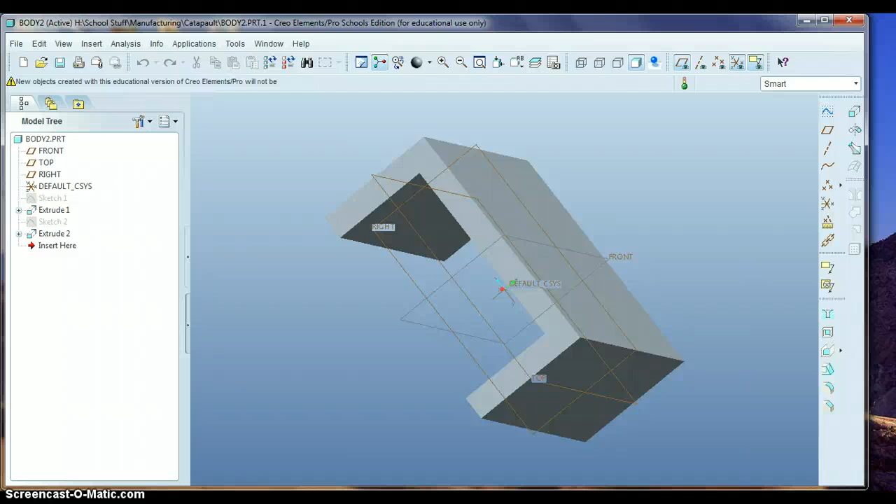Alright, we're going to add the holes for the wheels and also for the crank on the side of the catapult here. So to do that, we're going to go to Sketch and click on the side here. Make sure you don't click on one of these lines, but somewhere here in the gray. Click on that and you should see Surface here. We'll hit Sketch.

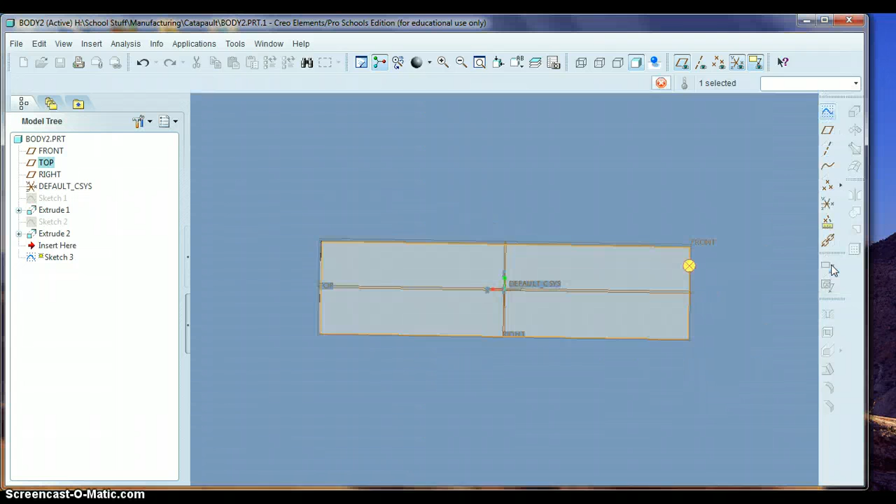Now we're just going to draw a hole somewhere like that, and let me measure this real quick to see what size this hole is. Looks like this might be too big, but we'll go with this to start with. Looks like about 1/4 of an inch, which is 0.25.

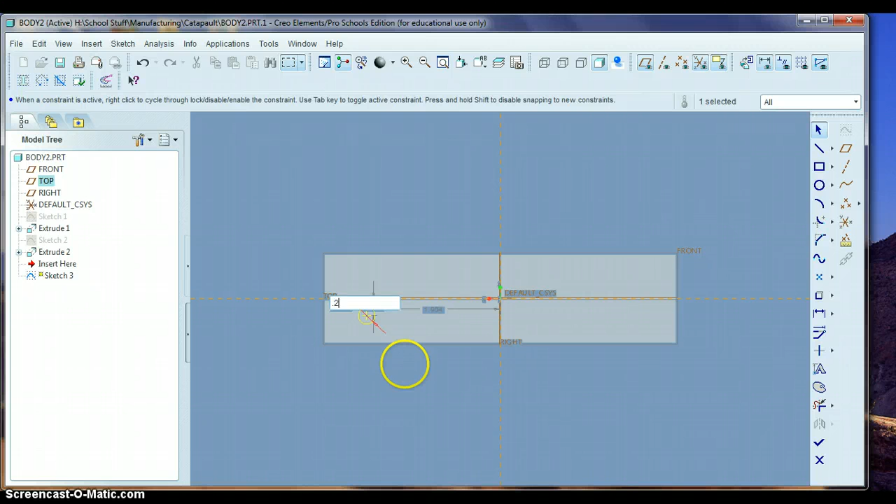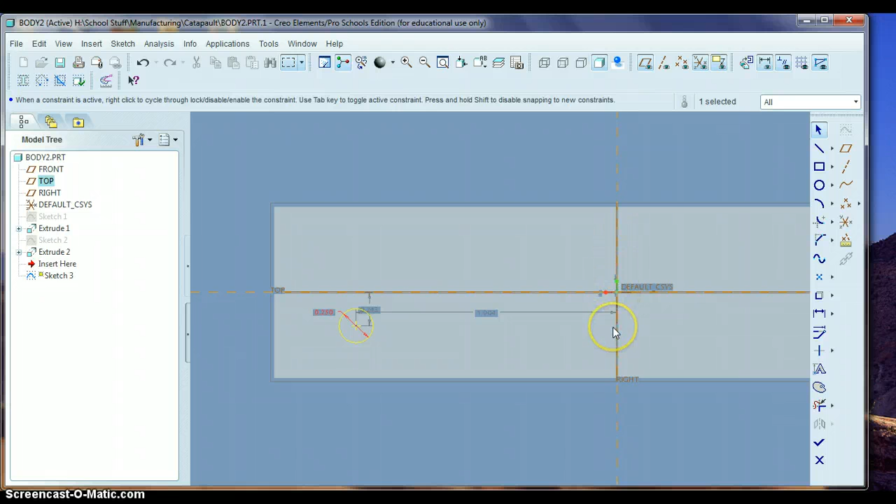Now we need to locate this, and so I have a couple dimensions here. One dimension wants to go from the center of this part to the center of the circle, and usually holes and circles are measured from the center. So this one right here wants to go from the center of the circle to the center line here of the part. Now I don't really know where the center of this is. I mean, I could figure that out, but for us, I think a little bit better way to go is from an edge, to measure from these edges.

So to get a reference line from these edges, we can't just click on this here because the computer doesn't really know exactly where this edge is. So we need to define that.

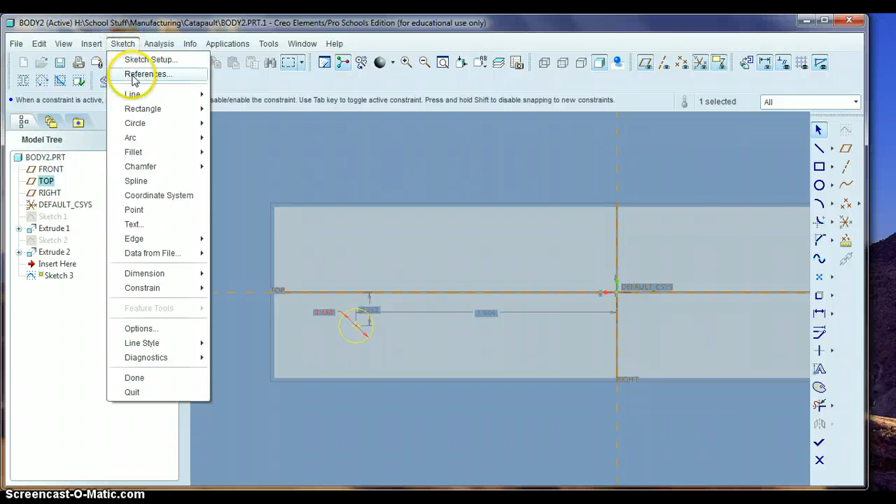We're going to go to Sketch, and in the Sketch pull down menu here, we're going to go to References. You can see this little box pops up here. I'm going to move my mouse over to where this little blue line pops up and click there. That gives me a reference for the front of this catapult. I'm also going to move my mouse down to where this blue line pops up at the bottom, and click that. So now I have a reference for the bottom and the front. And we'll hit close.

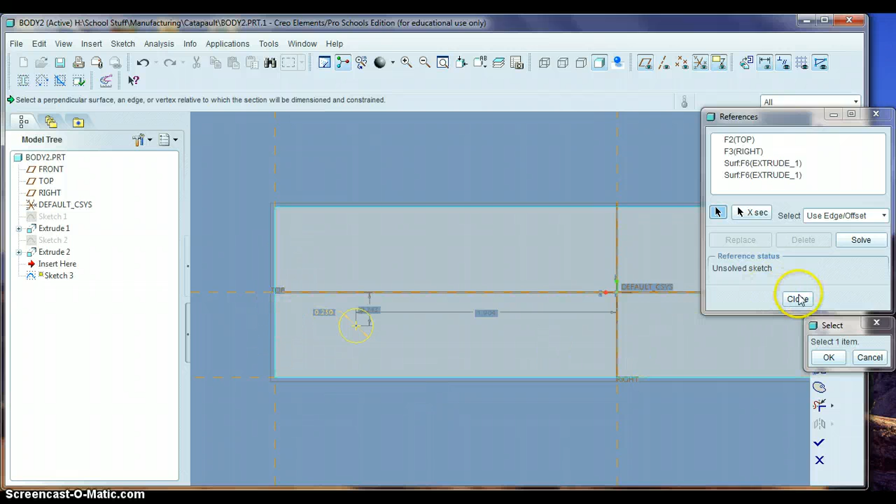And you can see already this measurement is now going from the front here. And what we have on Cobb's model is about 3/4 of an inch, which is 0.75 from the front.

And I'll even back up here. Let's say you don't have this measurement. We can add measurements real easy. We can go to this button right here. It says normal, but it's to create dimensions. I'm going to click on the center of this circle till it highlights blue. Then I'm going to go to the front here, this dotted line here, and click there. Those were 2 left clicks.

Now I'm going to use my middle mouse wheel, pushing down on it like a button. You can see it pops up with a dimension now, and again that was 0.75, enter. You see that other one disappears, and we're going to just go with this one.

So now I need to create a dimension here from the center of this circle to the bottom to figure out where that goes. And we'll go with about 1/2 inch here.

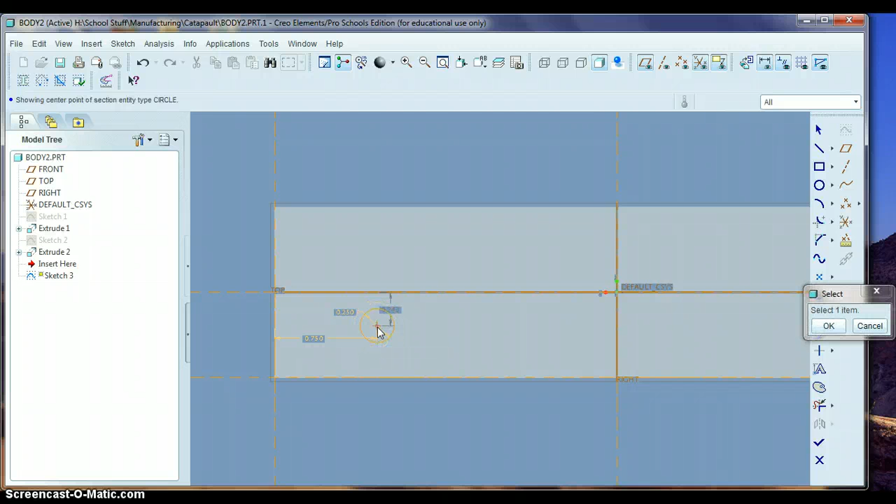So I'm going to highlight, turn on the dimension tool, and this little window pops up. Don't hit that — if you hit OK, we've got to start it all over again. So just click on that and leave that little box alone. Again, start in the center of the circle, left click, then left click with the left mouse button down here, and then use that middle mouse wheel like a button, and click. And that was 0.5.

And that moves that circle up. So now we have the circle the size we need it, it's in the right location, and now we just need to add one back here.

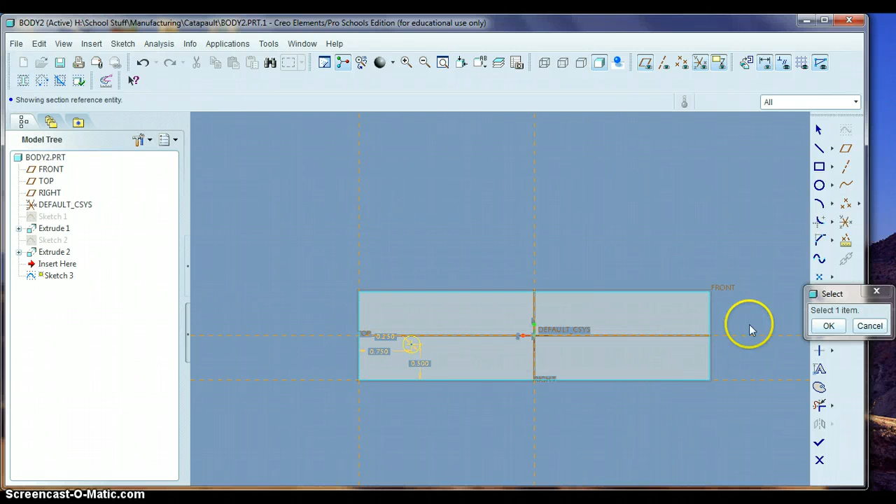So I'm going to click on the circle tool, and move my mouse around, and there's the bell. If you see this little red bar pop up on this, you can see it over here on the circle we've already drawn, and then wherever my mouse is, that means the center of the circle I'm going to draw and the center of the previous circle are in line.

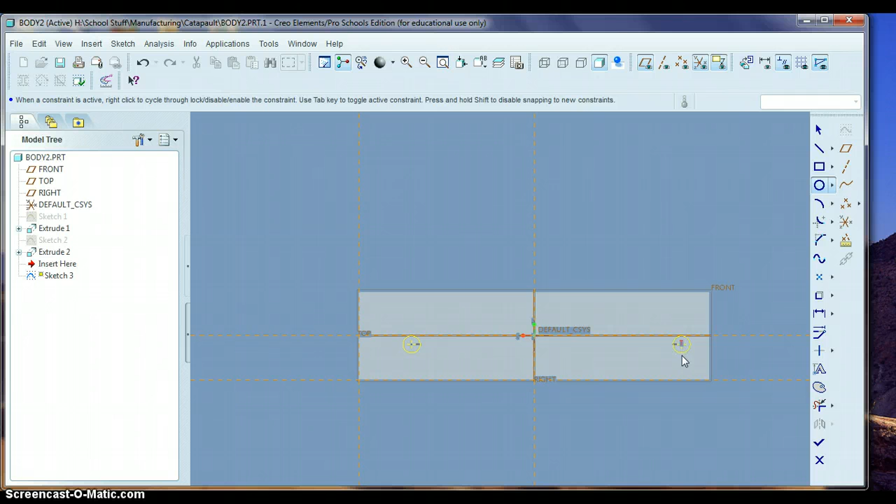That's what we want. We don't want to have to go back and refigure out where this goes. It'll save us a few steps. So I'm going to click and move my mouse until I see a red R pop up.

There it is. It's the same size as the previous circle. You see there's a red R on the first circle that we drew, so that means they're the same size. We don't have to go back and figure up and create the dimension again.

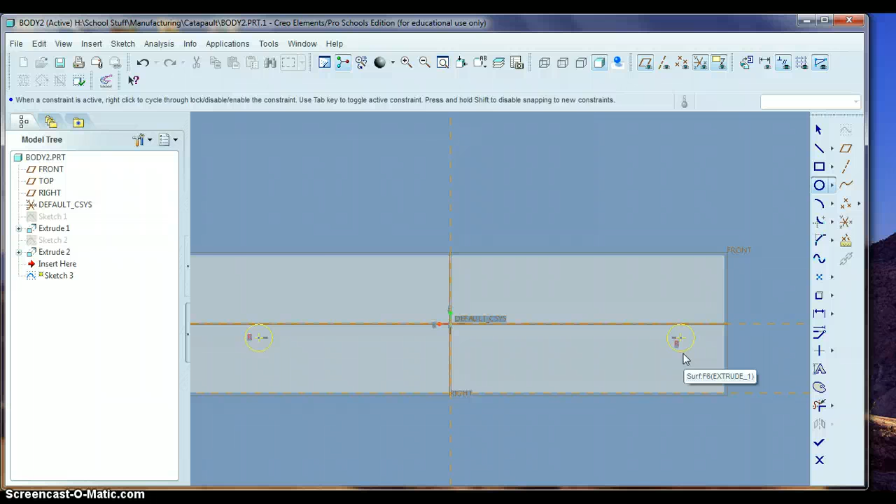So again, move your mouse till you see that red R, and then click, and click on this blue arrow. So 0.25, this circle is 0.25 because it's going off of this measurement here. It's 0.5 up. Now we just need to figure out how far

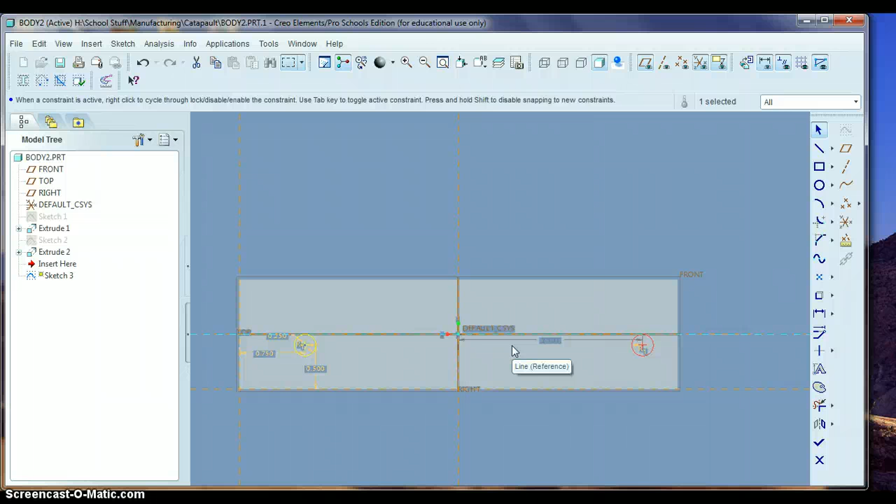away it is this way. So let me measure real quick here. We'll figure this out. This circle is 4.5 from the front. So I'm going to click on the dimension tool and click on the front, this reference line here.

I'm going to click on the center of this circle, then use that middle mouse wheel again as a button, and that pops up, and it was 4.5. You can see we were pretty close on that. We'll just make it accurate.

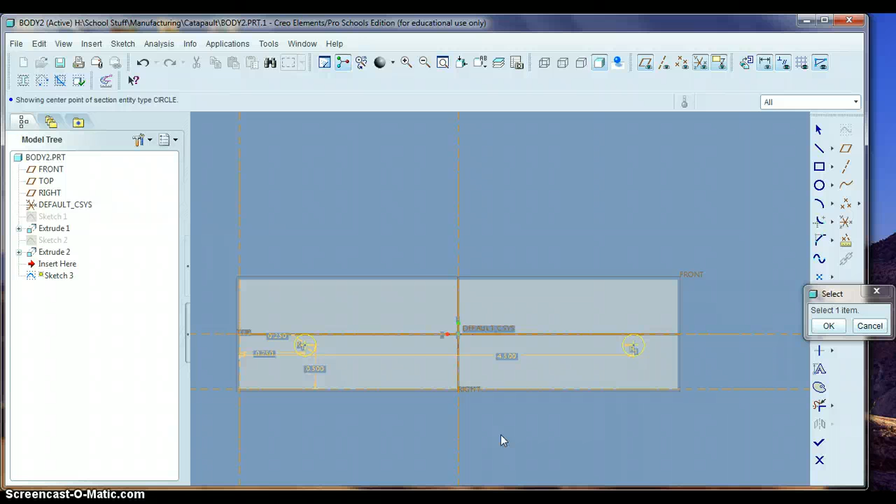So there's that one. And then the last hole, I don't exactly know where it was going to go, but somewhere in the middle here. I'll tell you what, just to make this easy, we'll click on the circle and we'll move our mouse right on this center dotted line until that red line pops up, and then again move it out until you see that R.

And that's right in the center. It should be right in the center of our part, the body. Same size as the other two circles. So we should be good.

If you don't have some of these reference lines, let me know, I'll be happy to help you get these. We'll hit the check mark.

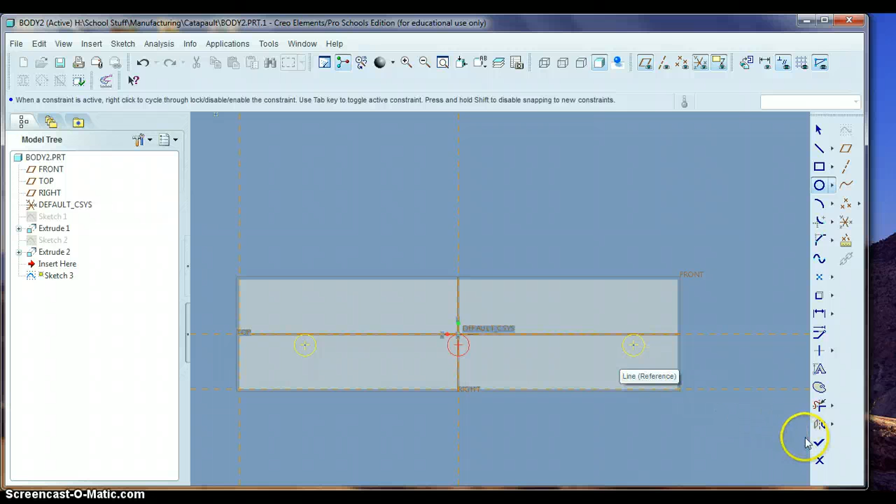We're done. And now to make a hole, we're going to hit the extrude button, kind of like what we did when we cut out this middle part here. I'm going to use this little arrow. I'll flip the direction.

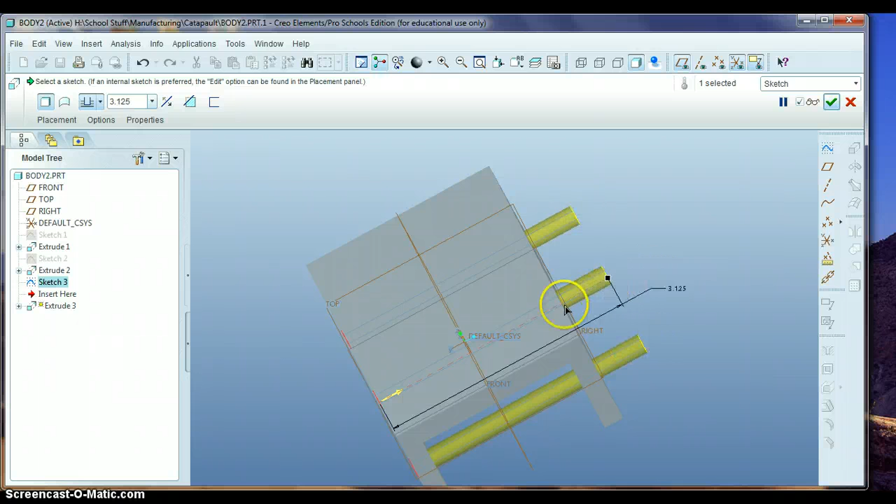And again, you can use this little white box here and drag it out, or you can use this pull down menu and say have it intersect with all surfaces, and it pops it out there. And then we'll hit the remove material button, and we'll hit the green check mark, and there's the holes for the axles and for the little crank to pull the throwing arm down.

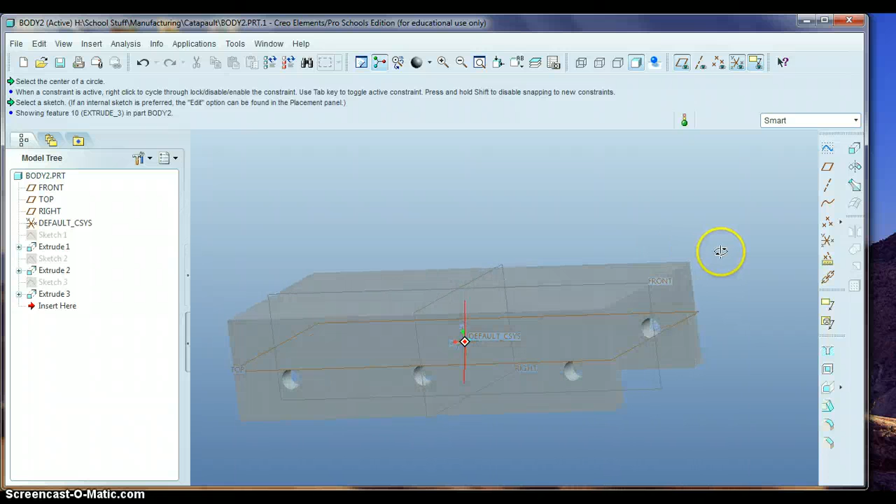Now the last thing we'll do is we'll put a hole in the top of the body, so that we can have the little string or whatever pull the throwing arm down. So I'm going to go to sketch. I'm going to click on the surface again, just somewhere over here in the gray, and hit sketch.

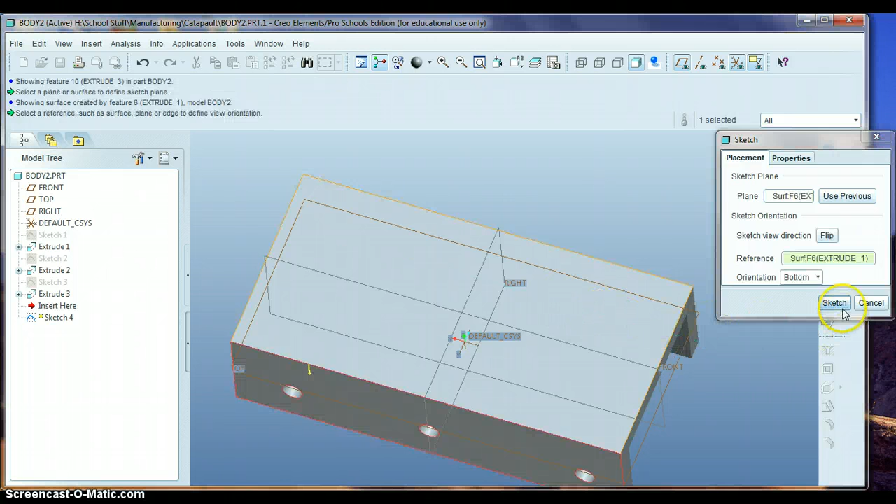And there's the bell again. And I'm going to, well, let's see, yeah, we'll just put it right here in the middle. We'll start that circle right here in the middle, and I don't know, we'll go 0.75 on the diameter of that.

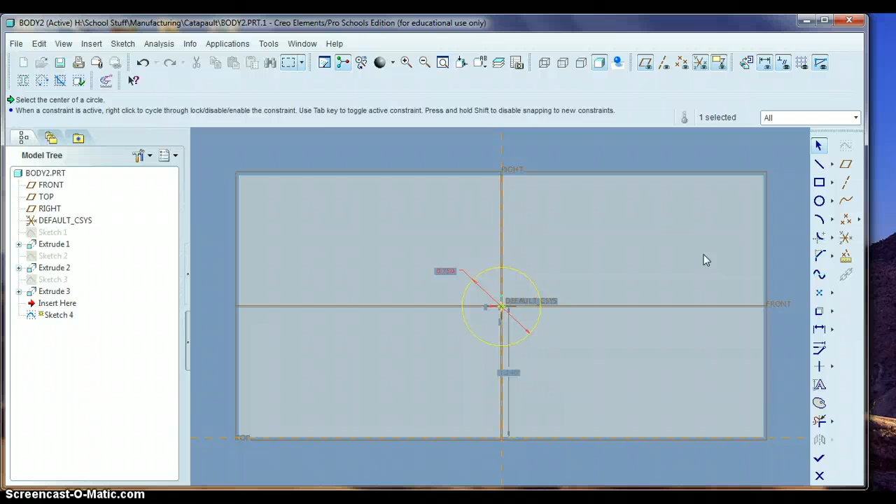And this is one of those things we might end up changing later on. Cobb's model had a square cut out of it, but for us, when we actually manufacture this, just using a drill bit and making a circle or a hole will be a lot easier. So 0.75 on that. Center should be somewhere in the center of the body, and we'll hit the blue check mark. I'm going to rotate it up just a little bit.

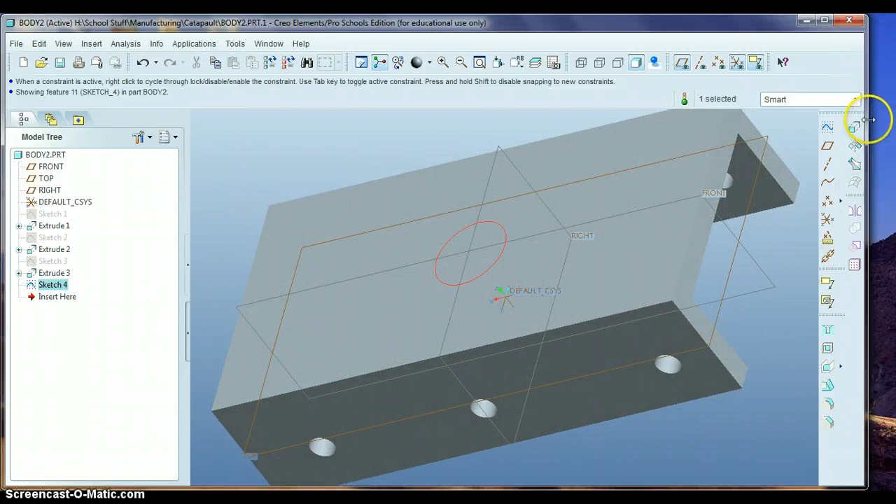And again, we're going to hit the extrude button. We're going to flip the direction, and this actually goes through the body pretty far, so I'm just going to leave that. I'm going to hit the remove material button, and then we'll hit the green check mark. And that's that. If you have any questions on adding those holes, just let me know, and I'll be happy to help you.